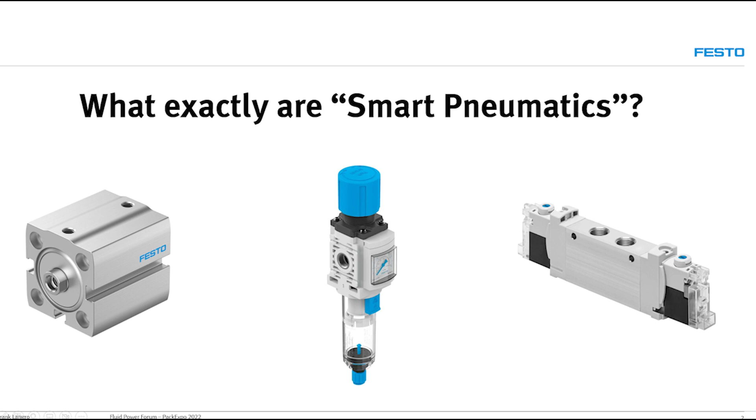So here I show a cylinder, a filter regulator, and a valve. With the cylinder, basically the rod will extend and retract whenever it receives an air signal from the valve, right? And the filter regulator regulates a pressure based on whatever manual input somebody gives it. And the valve will turn on and off and shift direction, again, based on whatever input is received. So really, they're acted upon. They're not exactly smart. They're not adding any intelligence to the system. They get told what to do, and they do it. They don't talk back, basically. They do what they're told to do.

Now, what if you added a cylinder switch, for instance, to the cylinder? Perhaps a cylinder switch that also gives you a value, indication of position, not just that the rod is extended or retracted, but an actual analog value. That's one thing you can do. Or if you had a device that would regulate pressure and flow in your air prep and also record the machine profile, the pressure profile of the machine, how it works, as it's operating and cylinders are shifting, and you get a fingerprint essentially of that machine.

Or if you had a valve that can be reconfigured based on software to act as a different type of valve or to do functions like flow control or pressure control based on some software commands. So this starts to enter the realm of smart pneumatics, what I would consider smart pneumatics.

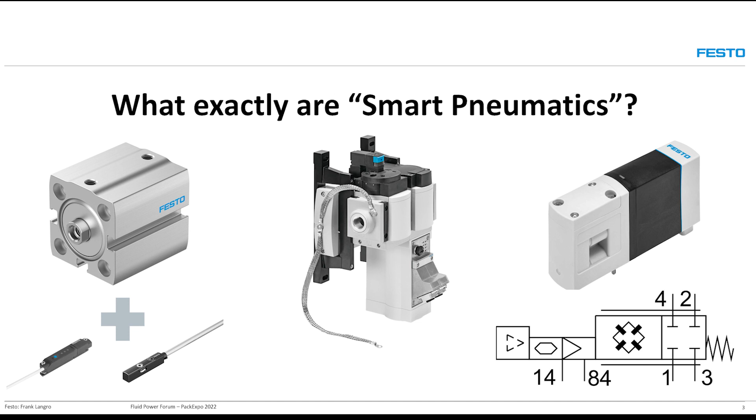So what are the challenges that OEMs and packaging OEMs are faced with? I think as you go through the show this week, you see flexibility is something, fast changeover, because they're running multiple products in different sizes, so they need to be able to change over quickly. Reduce downtime, another big topic, right? Also monitoring. I've seen this too, where the health of the machine is something that people are more and more concerned with.

Efficiencies, reducing waste, both in energy consumption as well as in materials. I think that's one of the things when you see these green initiatives and a lot of the machine builders are really trying to cut down on the materials used in terms of packaging and so on because of initiatives from their customers.

I just want to step back and look at basically the evolution of production. Typically you had machines, manual machines like a manual lathe here, manually operated. Then you went into dedicated machines where you had machines that would produce the same part in high volume over and over.

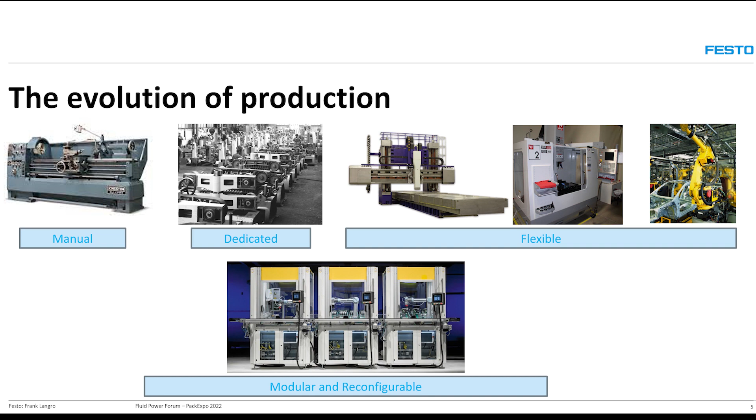And then you started to get into flexible manufacturing, and most machines today have some flexibility in there that you can run different sizes or so on. And then you get into modular and reconfigurable machines where maybe depending on the features that a customer wants on a machine, they may add on something, maybe a wrapper or some other function that would extend the machine beyond just packing and wrapping and palletizing. And so you get into this modular reconfigurable type machine, and that goes more and more towards the flexibility aspect.

Just a quick snapshot of all these different, same product, right? It's Coca-Cola, same exact product in each of those cans or bottles. But you can see the variety of different shapes. And then when you throw the holiday season in, right, you start to get different packaging as well. And so that goes into that flexibility that the machine builders are looking to implement for their end users.

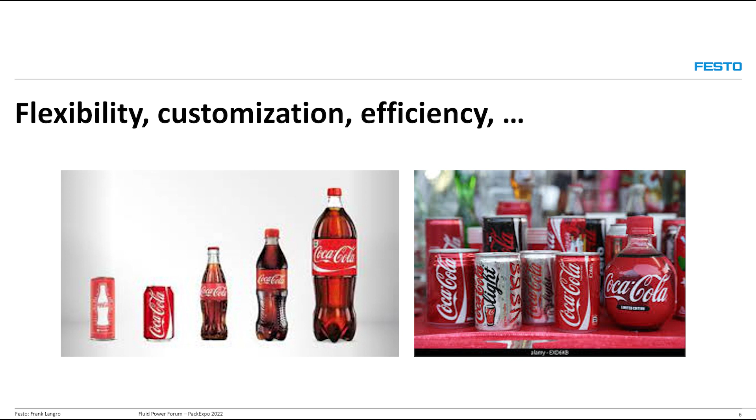I just want to show this slide from Gartner because I think it really is a nice overview of the type of analysis that goes on, the amount of human input that then has to happen till you get ultimately to a decision and then the action. And so a lot of it was basic business intelligence, right? You had data and you have what it would call descriptive. It basically tells you what happened. Something happened and you want to be able to identify what it was, what occurred.

And then with this type of data, you start to enter the realm of diagnostic data, like why did it happen? And you can see as you get more and more information and more data, the human input starts to be decreased. When you get into advanced analytics, everybody's starting to look towards predictive analytics. What will happen if I recognize something on the machine? Can it tell me what's going to happen next week?

And then, ultimately, I think where everybody is striving to get to is prescriptive analytics. And basically, just like a prescription medicine, it's preventive, right? You do something so that something doesn't occur. So prescriptive analytics would be, what should I do in advance so that I don't have an unplanned failure, or I don't produce defective parts, or I optimize the material usage in the machine. So that's ultimately the end game that everybody is striving towards with advanced analytics and so on.

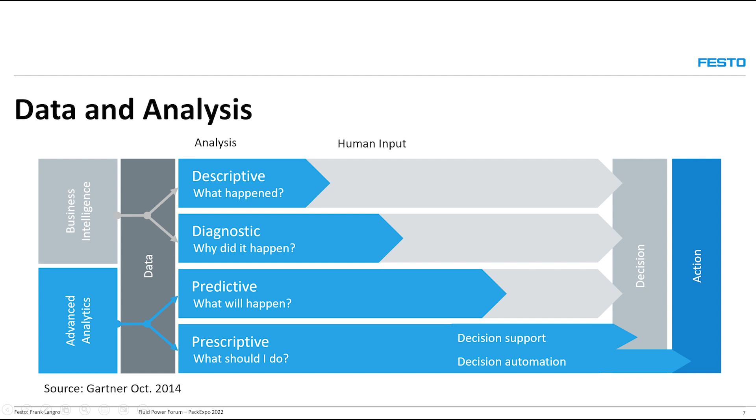So coming back to my simple cylinder, for many years, people have used cylinder switches, and basically this tells you when the piston is at one position or the other position at the end of stroke. What you see now also is that you may get position transmitters. And for example, Festo offers position transmitters that have different degrees of ranges. As you move towards the end of stroke, you get into giving analog values. And it could range anywhere from 10 millimeters to 50 millimeters, depending on the position transmitter, as well as the length of the cylinder and the stroke of the cylinder.

And one of the things that this would be very useful for is maybe if you wanted more detailed information, if you're checking a part and you're using the cylinder to check the thickness of maybe a packaging material, or a film or something like that, you can now see if it's within spec, if it's out of spec, and avoid using it. So I'm thinking in terms of packaging material, maybe you don't want to go above a certain thickness because it's not needed. And here, perhaps with an analog position transmitter, you could start to get information like this.

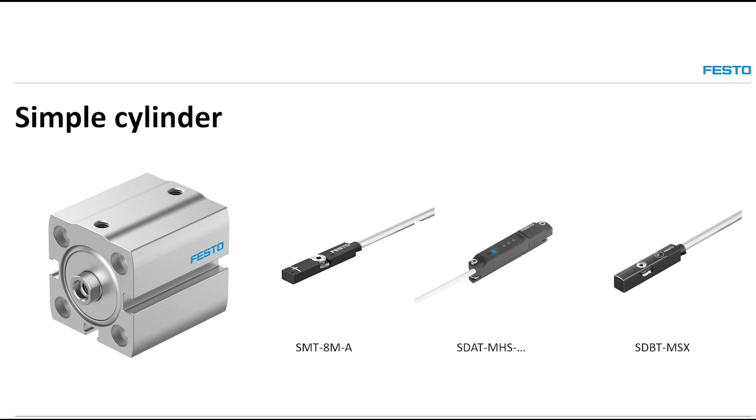Now we've also released a new cylinder switch, and while it's typical, it goes back to sensing the end position of the piston. The interesting thing about this switch is that it is a self-teach switch. So typically with cylinder switches, you have to be fairly precise and put them in place. With this new cylinder switch, you really just have to put it roughly in the area.

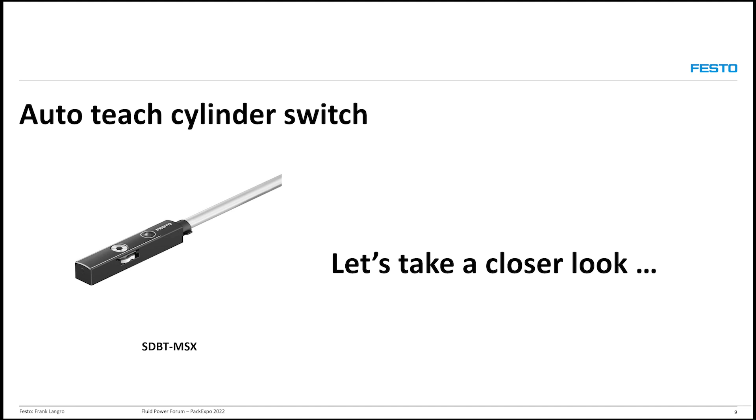And it will teach itself. Normally, you would need power, you need visibility to recognize the LEDs, and also often these are run without loads running through the machine, so you still get piston seal compression and things like this, which will actually move the position of the piston slightly. And sometimes these are in hard to reach locations, so it can be challenging and time consuming, especially on a machine with a lot of switches, a lot of cylinders.

So what this switch does is it has a range of sensing, and really all you need to do is roughly mount the switch in here. Once the cylinder runs 4 times and runs through the switching zone, it actually teaches itself the correct position, and offers a signal as the piston reaches the signaling range. So here you do have some intelligence, as the product is teaching itself.

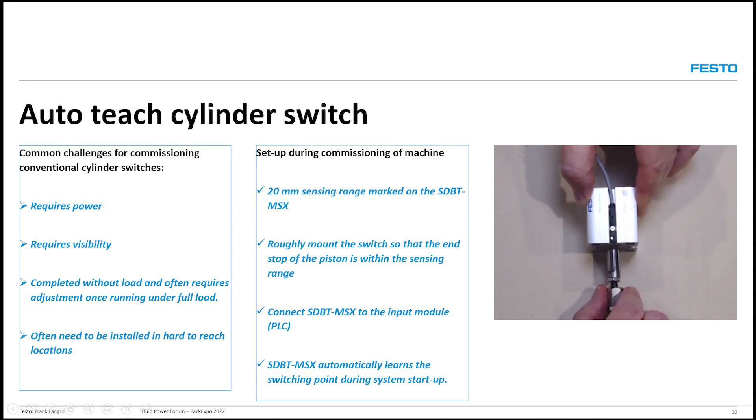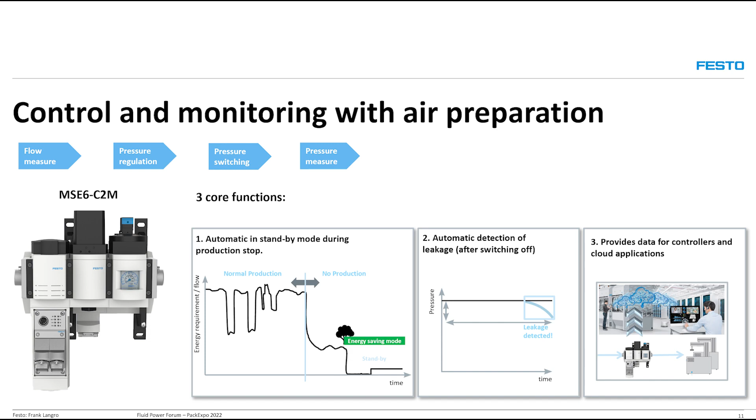What this also does is it's getting data that you can supply to data controllers and cloud storage for further analytics and applications.

A closer look shows these things are configurable by the user: how long you want to wait to recognize a downtime, what pressure you want to go to standby, whether you want to drop it all the way down, or maybe you want to keep some pressure in the machine because of some function or a preset condition to do a startup. It'll also detect if the machine starts leaking. It can also go into standby pressure mode, where it allows the pressure to build back up if it gets too low.

So these are things that clearly show it's not just a pressure regulator that's manually adjusted. There is intelligence, as the device is acting and reacting based on the environment and some of the settings that you give it.

I mentioned the valve before, and I just want to describe, because I always like this visual of a smartphone and a smart valve. Everybody's phone now is more than a phone, right? You can send emails and text messages. You can have music and other media on it. You can play games, take pictures. It all depends on what software, what apps are loaded on the phone, and you can then use it for these different functions.

With Festo's motion terminal, the VTEM, the valve itself is configurable based on software apps. So instead of having to have a separate valve for a 5-3 valve or a 3-2 valve, or add in a physical pressure regulator or a proportional valve, you can actually do it via the software with the same set of hardware. And that's pretty interesting, because the hardware then becomes reconfigurable.

And if you start to think about things like spare parts, or just the complexity of the system, or even security, because now you're controlling things via the software, you really do prevent some manual tampering and things like that. It really does open up a new world of machine building.

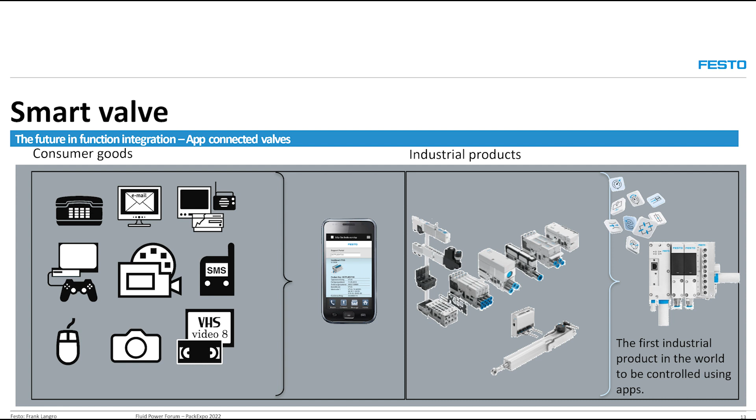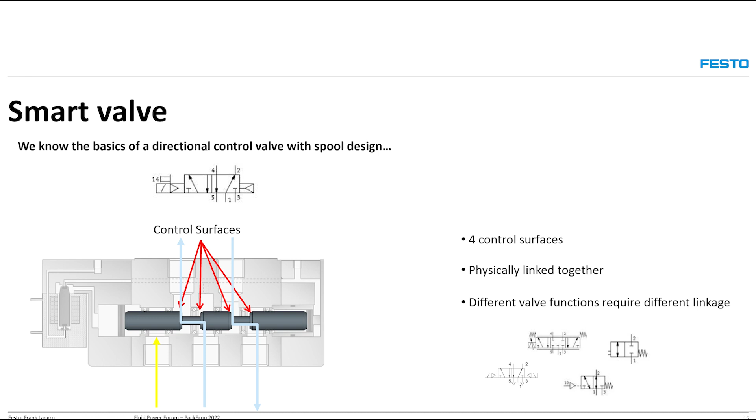So we know the basics of a directional control valve. I'll just explain how this works a little bit. You have a spool design and you have control surfaces. Typically, in this case, there are 4 control surfaces, and it's physically linked together. You can see that the link here, it's a mechanical spool. Its geometry is based on the control surfaces and the valve body, and you have air passing through depending on what position the spool is in.

And if you go into different valve functions, it requires a different geometry of spool, so there's physically different hardware that's required.

What the motion terminal does is it uses 4 diaphragm poppet valves inside a single valve housing, and each of these is controlled by 2 piezo electric pilot valves, proportional valves. So now you get proportional action in here. By putting them in this bridge circuit and connecting them to outlet ports 2 and 4, you can create a number of different functions. There is a pressure sensor at each outlet port, integrated inside the valve.

So it's all self-contained within the valve like this. And that brings the closed loop feedback during the algorithms of the valve.

Just in case you're not familiar, piezoelectric is a ceramic. It's actually an old technology and an old phenomena that if you put a high voltage on this, it would deflect. There are a number of different types of piezo valves that can be made. We use the bender, where it basically deflects up or down and opens an orifice, creating more flow and less flow.

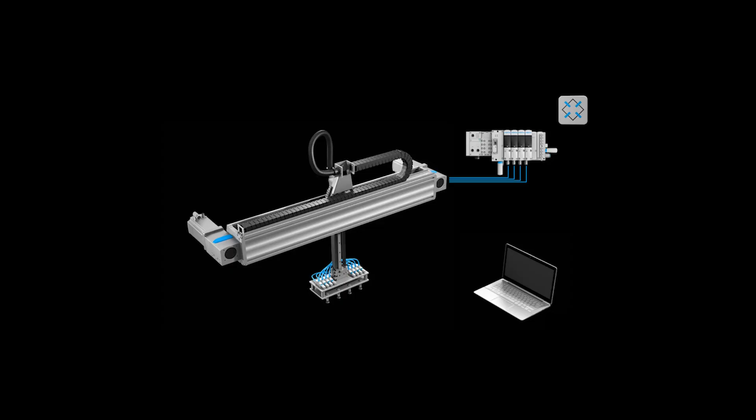I just want to show you, thinking about now, here you have a valve manifold up here in the upper right, and we're running some end of arm tooling and we have vacuum generators. So to do that, normally you would have 3-2 valves where you're turning the vacuum on and off.

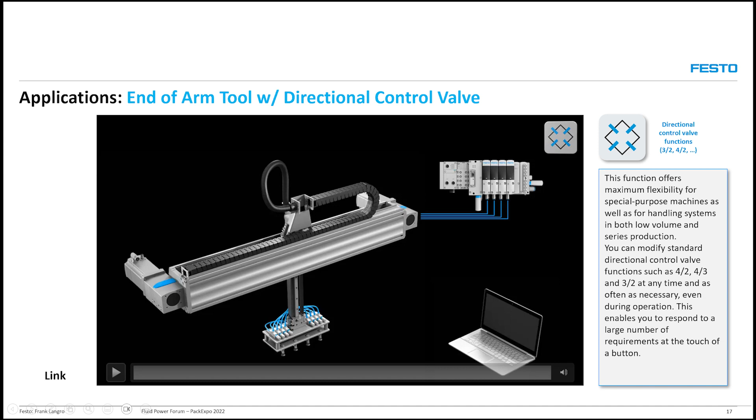That all works well and good. But now if you wanted to change that tool and put a gripper, there you would need a 4-2 valve so that you could exhaust, so you could extend and retract. You can do that with the same exact hardware you had before. You didn't have to change out the valve pack or have additional valves. So it really opens up the world for machine designers to reinvent how they do certain things.

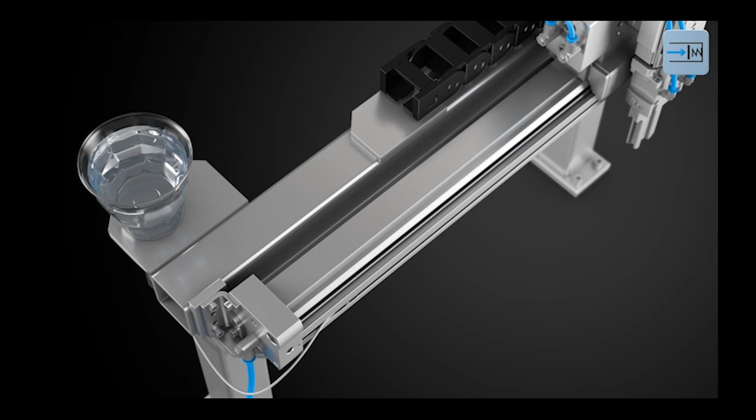Another example is end position stopping. What this animation shows, without bumpers, is the unit slamming into the end position and you see the water vibrate. So in order to eliminate that and reduce the impact energy, you put shock absorbers in, and now it cushions this. Now, shock absorbers sometimes can be challenging because you have to size them properly. If you overutilize a shock, it tends to fail. You also have to worry about leakage of hydraulic fluids.

So here with the motion terminal and an analog position sensor, you can change the motion on this and put a soft motion basically. So as the piston goes towards the end position, you can start to balance it on the other side by restricting the air on the exhaust side. With that precise control of the valves, you can create what's called a soft stop motion, eliminating shocks, reducing one mechanical item that could pose some problems or introduce irregularities into the machine.

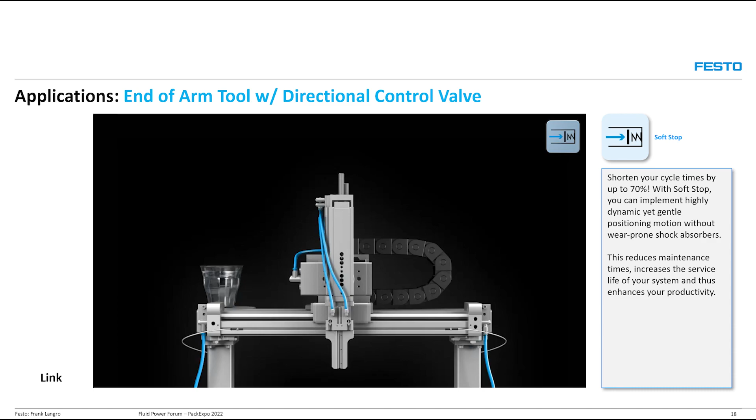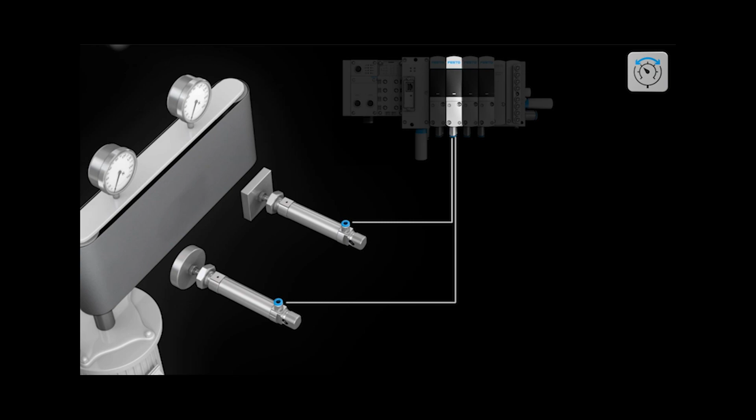Another application is proportional pressure control. Here, you'd have individual proportional pressure regulators, but by using a motion terminal, you can do that with your valve. I think this is a common application in terms of web tensioning or any type of film or element. We see that a lot in packaging equipment, flow wrappers, and labeling equipment.

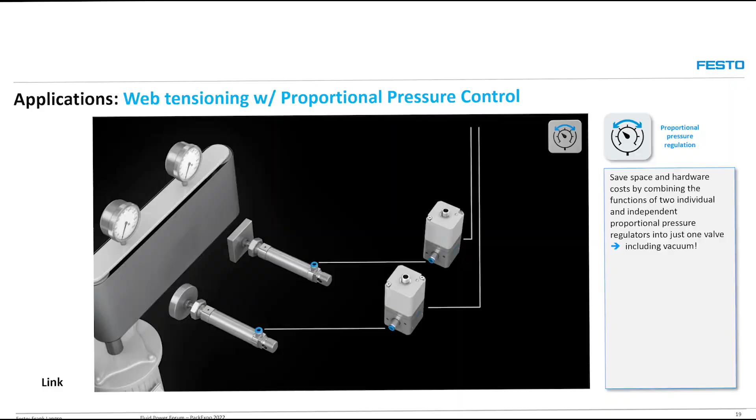But here's again where I get into smart pneumatics: the output, or what we're trying to do, is move in a certain time frame. The valve will compensate based on pressure fluctuations in the system, so it's self-learning in a way, in that it's going to correct itself to switch in that specific time frame so that the cylinder is extending and retracting as defined. So again, there's some intelligence now that moves into the world of pneumatics. It's not just a simple bang-bang valve switching anymore.

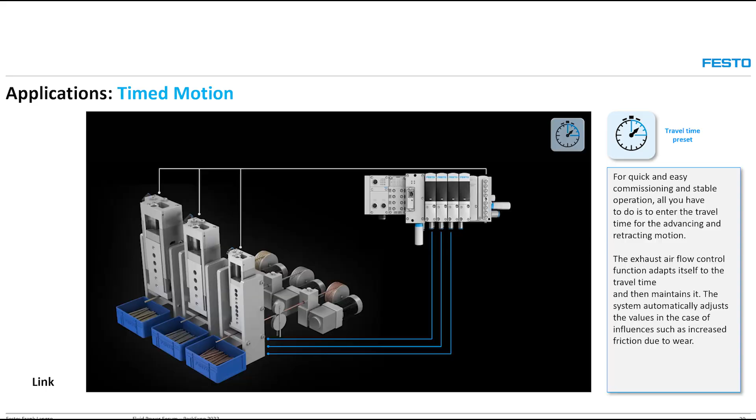So I wanted to show a couple of applications as well. Pressure and flow by far are the main applications we see with the motion terminal, particularly in packaging. It's also easy to change the parameters and very flexible to set up for running multiple products. And I mentioned earlier the safety aspect, really security - not machine safety, but more security regarding no manual adjustments on the machine.

So things are protected from tampering, when there's a button or a knob and somebody wants to twist it, turn it, see what happens. Something's not working, they start adjusting things. It kind of keeps that aspect locked out and prevented from happening.

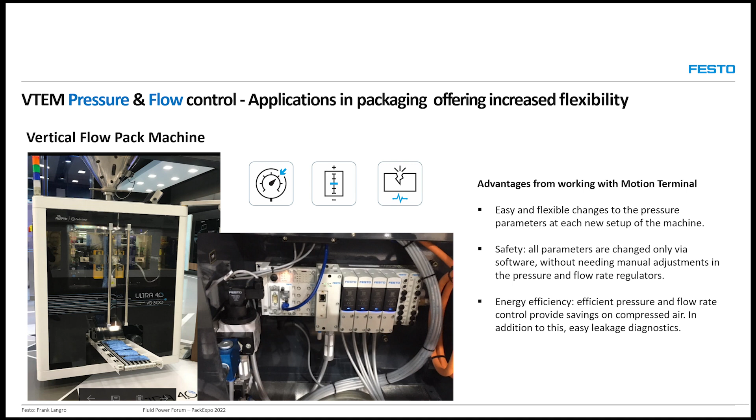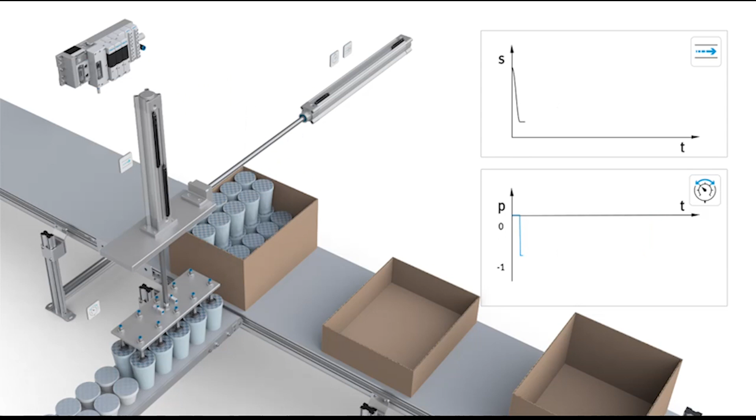So here's an animation of a typical machine using vacuum, and you're picking up product of a certain size and placing it in the box. Now there's going to be another product, different size. You need more vacuum force because it's a higher load. You also have to change the stroke of this cylinder because it's moving up over the lip of the box. It's also not extending the same way as the other one. So this is running different products and having that flexibility.

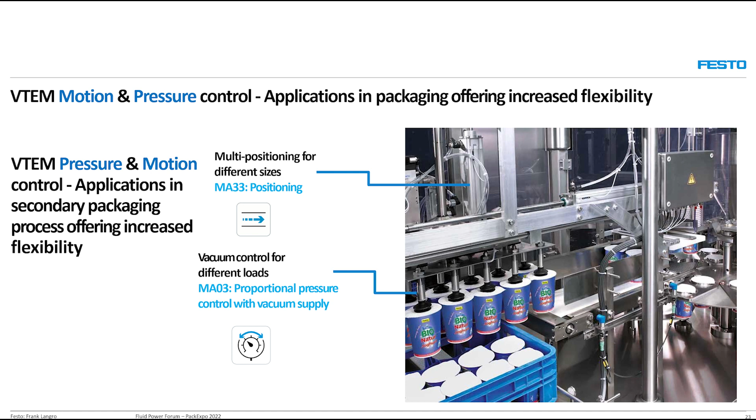So I think if you walk around the show, you probably see things requiring this type of control. There's another flexible example - we have a customer, Advanced Manufacturing Technology. They're actually at PACK EXPO this year, at booth S3076. They manufacture conveyor lines, holding bottles and running them through. What they use this motion terminal for is to do the quick changeover so there's different bottleneck sizes. Maybe the bottles also have different capacity and loads, so they need to be held with different forces. This allows them to do that stuff very quickly.

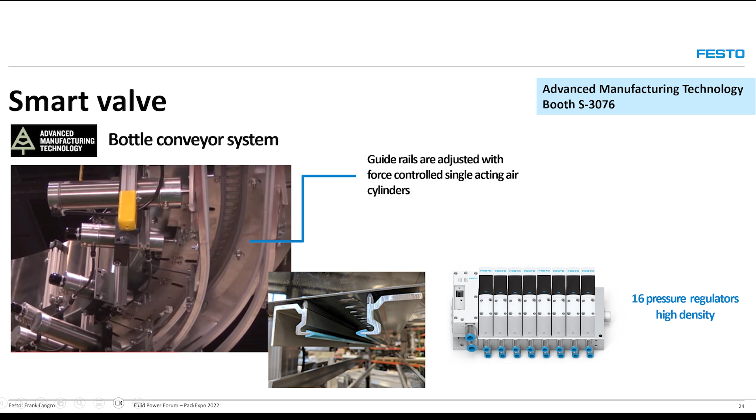The cylinders here are controlled by the valve pack, moving these guides basically to change neck rails that hold the bottle.

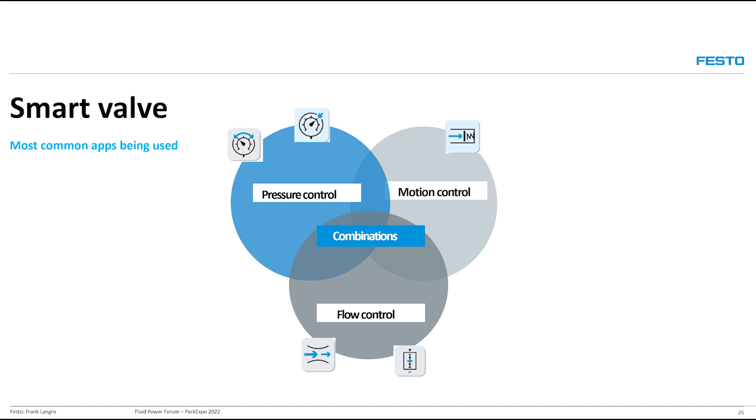So while there's a number of different applications that can be applied, the most common are pressure, motion, and flow control, and you can combine them all together. So, I'd say - am I allowed to use the term smart pneumatics now? And I think so.

I think you could see, though, with the issues of having qualified machine techs, a workforce that can utilize, shortages of workers, more automation coming into play - being able to reduce the human input into these aspects is really going to be a factor more and more in the future. So companies will be challenged to bring innovative solutions that can push the envelope into ultimately getting to prescriptive type analytics.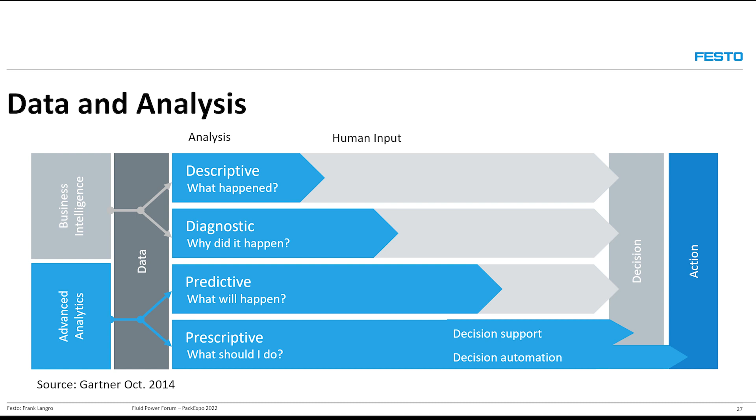I think Bradley spoke a little bit about the digital factory, and this is the key - we talk about smart pneumatics, and obviously there's electrics in here too, but connectivity is what's needed from these devices. You need a way to connect and get data, because once you have access to data, there's a bunch of different platforms, be it OPC UA, Factory Talk, clouds, and so on, that the data can be analyzed.

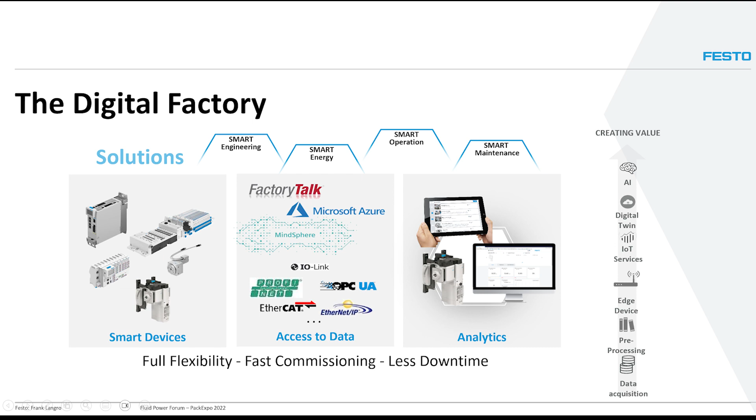You start to get into smart operation, and again you move up the chain. Ultimately, you get the data acquisition, you process the data, maybe you go from an edge device into an IoT device, ultimately getting into artificial intelligence, where the machine starts learning and tuning itself. We saw a little bit of that with the motion terminal, where it knows the parameter and knows the cycle time that you wanted for the cylinder, so it adjusts its algorithm internally to compensate for variances in the machine pressure, for instance.

This is a whole ecosystem of different devices. As I was saying earlier, you just have to get the connectivity to bring this up a level, and ultimately decide how far you go - whether you go just into a PLC, whether you start to go into an IoT gateway, whether you start going into cloud and other things.

But the data is there. IO-Link was a big step, with simple things like sensors and so on. It's becoming an expectation that you can get some data out of these type of devices, because the customer may want to use it at some point in their analytics.

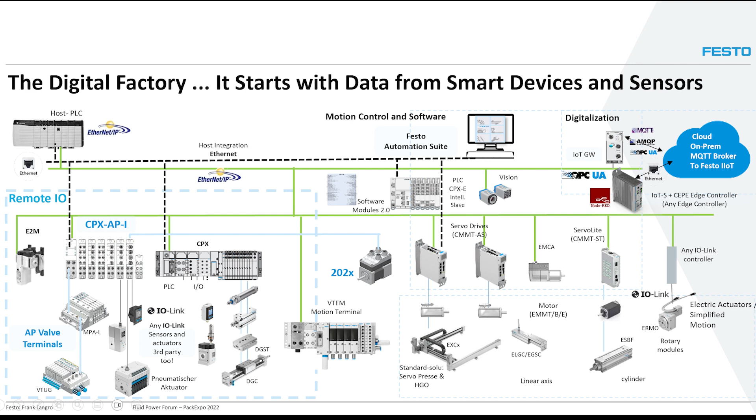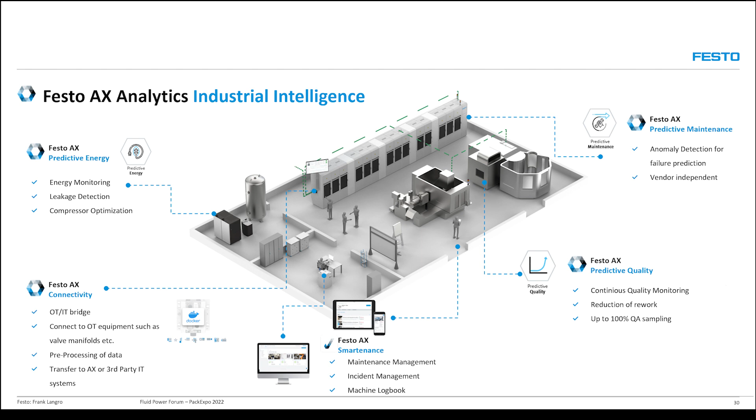So Festo also has a new product called Festo AX, and it is basically an industrial intelligence platform. What we look at is things like energy monitoring, leakage detection, which will lead to compressor optimization. We look to get the data and provide it to other parties if they're using a third party type device. We also have a maintenance package which can signal and prompt somebody on different incidents and logs and so on, and we're looking to get into predictive maintenance as well - anomaly detection for failure prediction.

We see some early adopters, primarily automotive, but also food and packaging and electronics industry. At our booth at the show this year, we're at N6213. We have our digital factory demo - it's a rather simple gantry system.

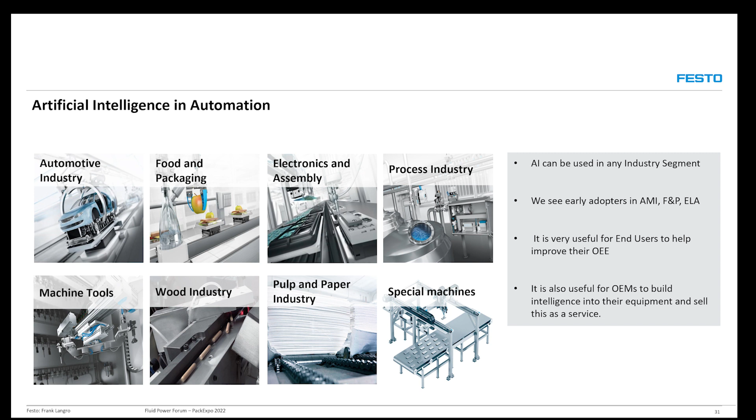But I'd like to just recap the improvements that we see with smart operation. Immediate repair - recognizing failures quickly and pointing them out so that you can go fix them immediately, not have to hunt and shoot.

Recognizing deviations in the operation before they become a problem. Again, this goes into knowing your machine and how it operates and what the critical processes are that you're doing. But once you start to develop that fingerprint of the machine, it starts to become clear when you start to get failures - you start understanding what are the precursors to that failure occurring.

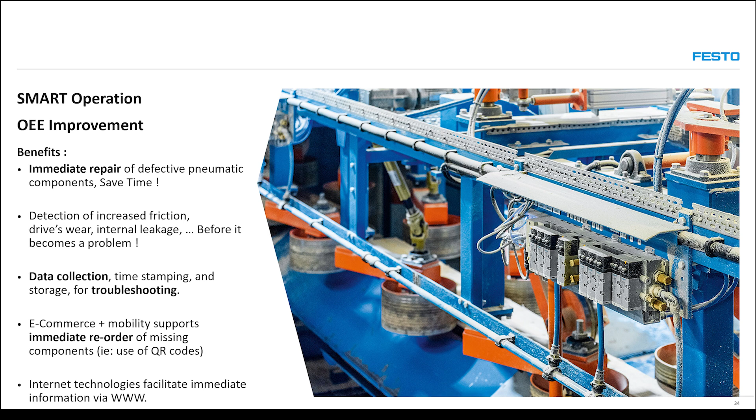The data collection - big key here. Also, smart operation, the flexibility of machines - I think that's a clear demand. When we talk about quick changeovers, we see product life cycles are shorter, so we really can't afford to use dedicated machines and dedicated production lines like years ago. There was a phrase I always heard with Industry 4.0 or smart manufacturing - you want to use high volume manufacturing techniques, high volume production techniques, for a lot size of one. You want to use automated equipment but be able to do this in a cost-effective way on small lot sizes. That's where increasing flexibility and changeover all comes into play.

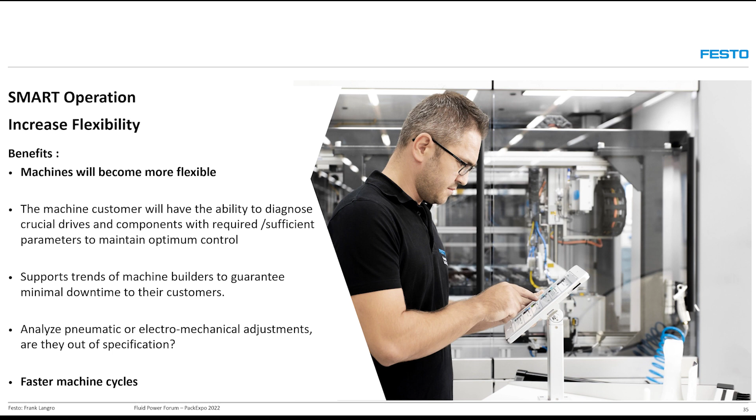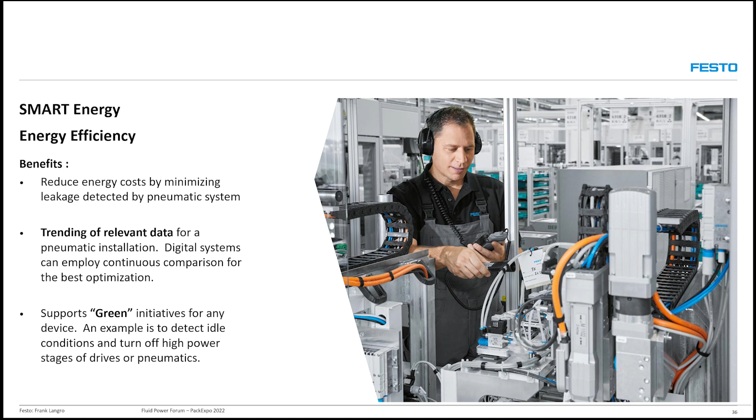And then energy - reducing cost, green initiatives, reducing waste, recognizing air usage, recognizing material usage, cutting down on that. These are all important things, and I know many companies have some sort of green initiatives, whether it be specific to cutting air or more general on carbon footprint. And carbon footprint can be reduced in a number of ways that impact production.